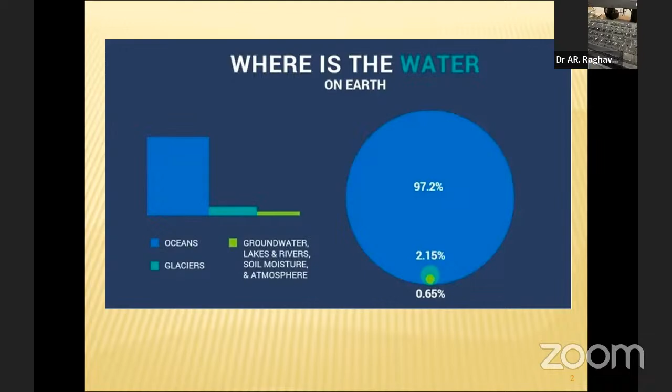I am Raghavan. Today I am going to discuss the management of drinking water quality with excess iron. Before going into the topic, this month we are celebrating World Water Day, so I thought it would be appropriate to talk about the water source. Where is the water on Earth? In the global water scenario, it is appropriate to know about the water resources.

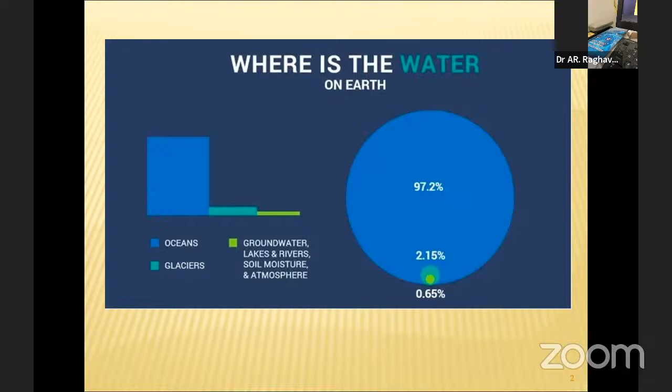Out of 100%, 97.2% of water is available in oceans, which is not suitable for drinking. And we are left with 2.15% in glaciers, and groundwater is 0.65%. This is the global water distribution. 97.2% in oceans is not at all useful for human beings. The same is given by numbers: ocean 97.23, glaciers 2.1%, and other forms of water. Groundwater is only 0.65% of the total water.

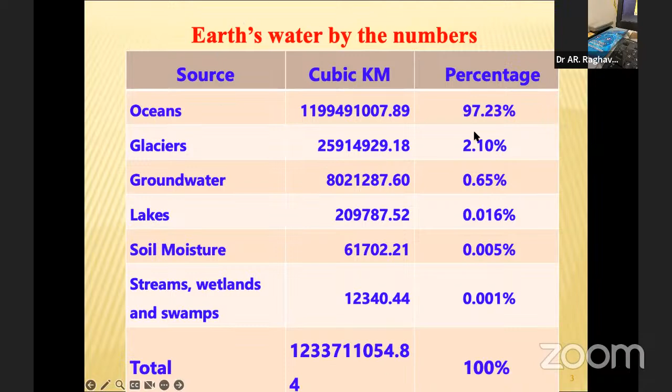Of 100%, only 0.65% is groundwater. Water in lakes, 0.016%. Soil moisture is 0.005%. Streams, wetlands, and swamps contain 0.001%. All these put together amount to 2.5% fresh water. We have to manage our lives across the globe with this quantum of water.

Coming to water quality standards, we are following BIS standard 10500:2012. According to that, I have given the acceptable limit and permissible limit in the absence of alternative sources. For example, turbidity is acceptable up to 1 NTU. If there is no other feasible alternative, we can go up to 5. Likewise, TDS 500, 2000, pH 6.5 to 8.5, with no relaxation beyond that. Alkalinity 200, up to 600. Total hardness 200, 600. Calcium 75, 200. Magnesium 30, up to 100 allowable in the absence of an alternate source.

Coming to iron, the point of our discussion today. It is prescribed as 0.3 and there is no relaxation at all. It should be maximum 0.3; beyond that it is not acceptable. This is followed by the World Health Organization, EPA, and in our Indian situation, BIS also specifies the same limit. Likewise, manganese 0.1 and 0.3.

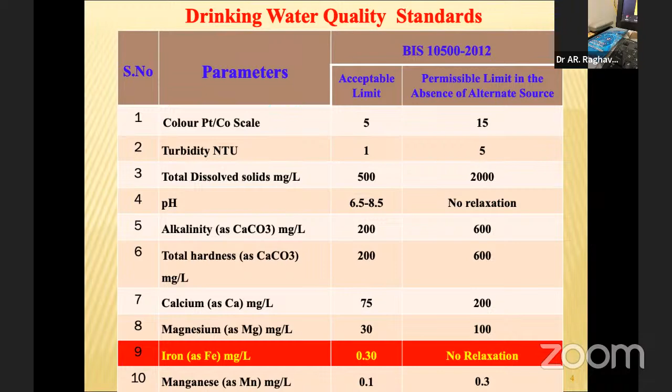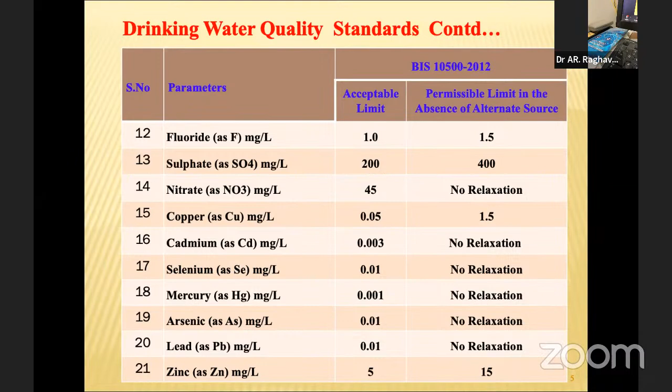Fluoride likewise, as you can see; sulfate 200, 400; nitrate 45, with no relaxation. Copper 0.05, 1.5. Cadmium 0.003, then 0.001 for mercury, arsenic 0.01, lead 0.01. There is no relaxation for these items. Zinc 5, and it can go up to 15.

In general, discussing water: water, as we all know, is an indispensable natural resource on planet Earth. The primary need for every human being is safe drinking water. Nowadays it is being called a commodity, as it is being sold. Groundwater is a major resource for drinking water in both urban and rural areas. It is a major freshwater resource, and more readily available than surface water.

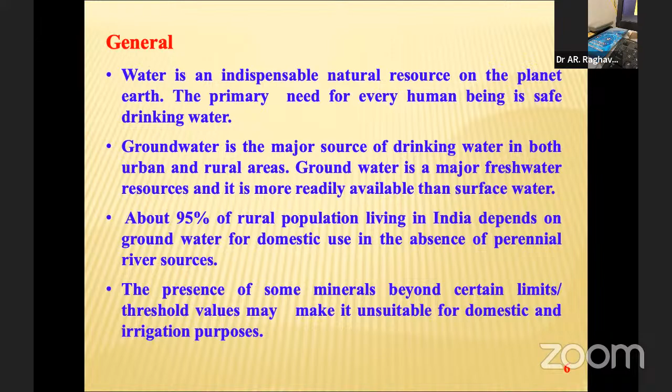About 95% of the rural population in India depends on groundwater for domestic use in the absence of perennial river sources. The presence of some minerals beyond certain threshold values may make it unsuitable for domestic and irrigation purposes.

Groundwater easily gets contaminated with iron, and though iron is an essential mineral for humans, its presence in water above certain levels makes the water unsuitable for health as well as aesthetic considerations such as discoloration, metallic taste, odor, turbidity, staining of laundry and plumbing fixtures. Moreover, iron oxides formed in reservoirs upon aerial oxidation of dissolved iron promote growth of microorganisms in water.

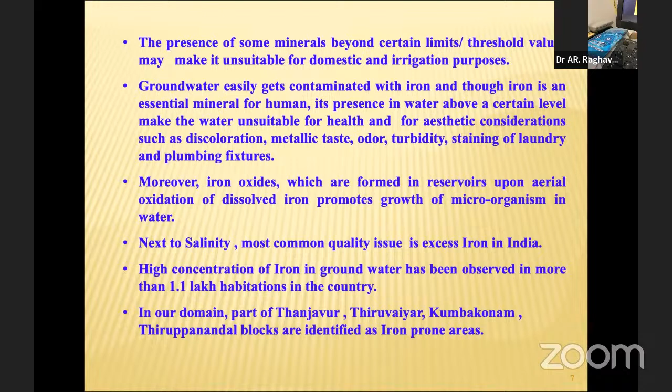Next to salinity, the most common water quality issue is excess iron in India. High concentration of iron in groundwater has been observed in more than 1.1 lakh habitations in the country. In our domain, parts of Thanjavur, Thiruvaiyar, Kumbakonam, and Thiruppanandal blocks are identified as iron-prone areas.

Harmful effects of excess iron in drinking water. Though iron is an essential mineral for human life, no doubt about it, we need to get rid of it when it enters drinking water because it has many adverse effects.

Iron in water affects our skin. The presence of minerals like iron and magnesium in excessive quantities can harm skin cells, leading to infection and wrinkles. Such water does not rinse off soap residue from the body, causing clogging of skin pores and buildup of oil in the skin, ultimately resulting in skin problems such as eczema and acne.

This is for skin. Effects on general health: the presence of minerals such as magnesium and iron in excessive quantities in water can harm skin cells, leading to infection and wrinkles. Such water does not rinse off soap residue from the body, causing clogging.

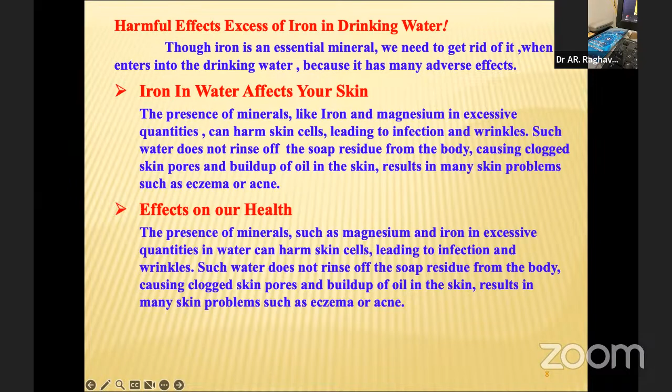Iron in drinking water develops an unpleasant metallic taste. If you use this water to make beverages like tea or coffee, the taste also gets affected. Also, water with high iron content will blacken fruits, vegetables, and other foods cooked in it and spoil the flavor.

Causes stains on plumbing fixtures and appliances. Iron tends to leave reddish orange stains and residue on bathroom fixtures, washing utensils, and dark red stains on cutlery and plates. It also causes the color of clothes to fade and reduces their quality.

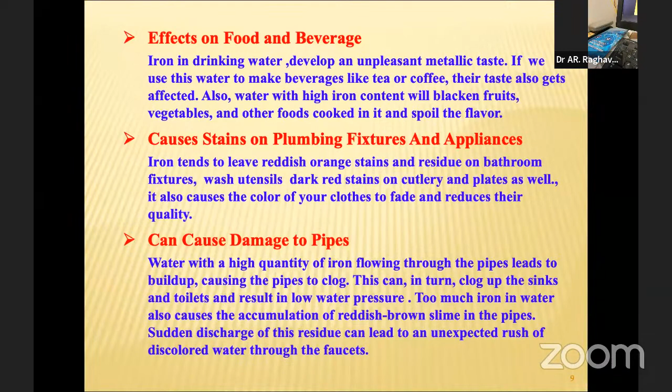It can cause damage to the pipes. Water with a high quantity of iron flowing through pipes continuously for a long time leads to build-up, causing the pipes to clog. This can in turn clog up sinks and toilets and result in low water pressure. Too much iron in water also causes accumulation of reddish brown slime in the pipes. Sudden discharge of this residue can lead to an unexpected rush of discolored water through the faucets.

This is another problem. Here are certain visuals on the effects of excess iron in water. See the staining due to iron in water while washing, and staining in plumbing fixtures due to excess iron in water.

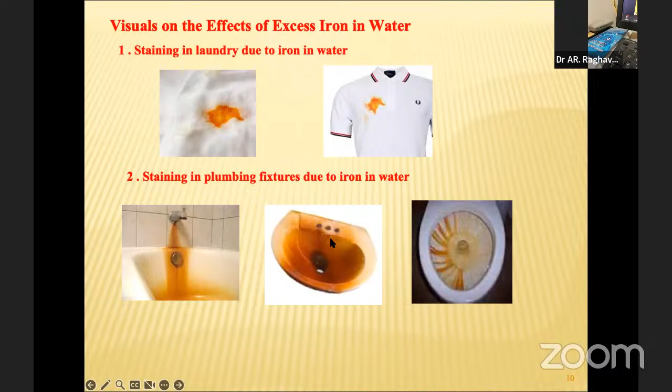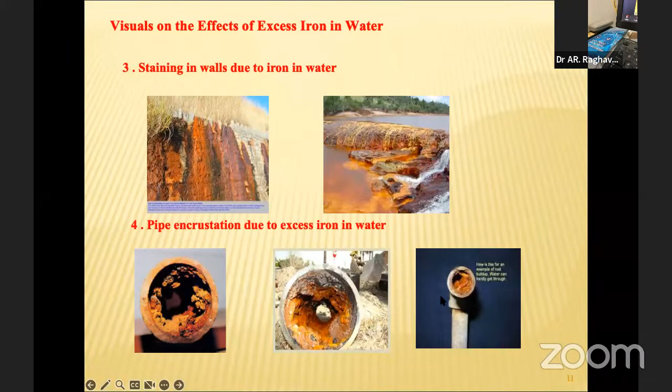Next, see how the surfaces of the waterfall contain excess iron. See the color of these waterfalls. And we are talking about pipe encrustation. See how these have built up over more than 15 years like this. The wall, see how the flow regime has reduced. See, these are all the things which are the causes of excess iron.

Okay, coming to a remedy. So far, the following are the practices employed for removal of iron. The major technique of removing iron is aeration and filtration.

The other techniques besides that: the major technique followed is aeration followed by filtration or sedimentation, whatever it is. Then comes adsorption, ion exchange, electrochemical, and membrane processes. These are all costly, membrane processes and all costly, and at large scale you cannot imagine the cost. So aeration and filtration are the primary techniques being adopted in our environment. Of the above, the most common principle is aeration followed by sedimentation, followed by filtration.

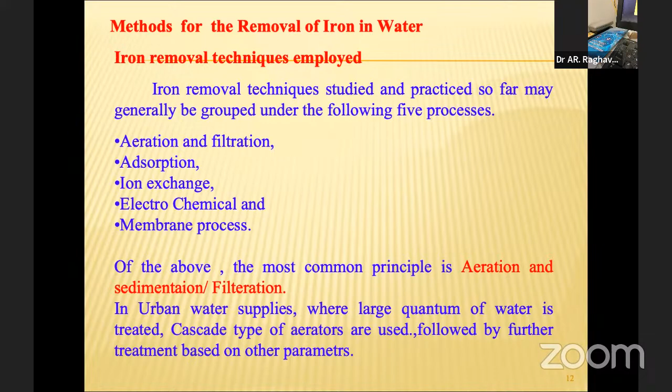Okay, in urban water supplies, due to the quantum of water being large, it will be treated by cascade aerators. During this cascade fall, the water gets aerated naturally by atmospheric oxygen. Then the iron, the floatable iron -- see, we have ferrous and ferric, two forms of iron. The ferrous is soluble and ferric is insoluble. So that soluble ferrous iron is converted on oxidation to ferric, and it starts settling at the bottom of the tray, and that is collected and eliminated during filtration. The treated water then goes for further steps of treatment. So in urban water supply schemes, iron removal is achieved by aeration, that too by cascade type aerators, as we see in the pictures.

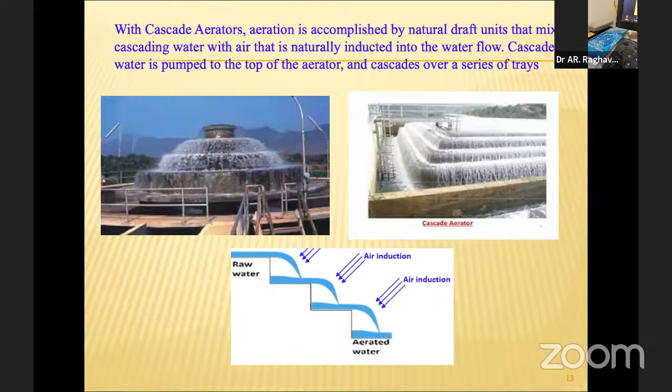Coming to our rural water supply scheme.

Even for rural water supply schemes, nowadays we have mega CWSs sourced from a single place, combining thousands of habitations to form a comprehensive water supply scheme. This will be done by cascade aerator because the quantum is large and the source is a single source.

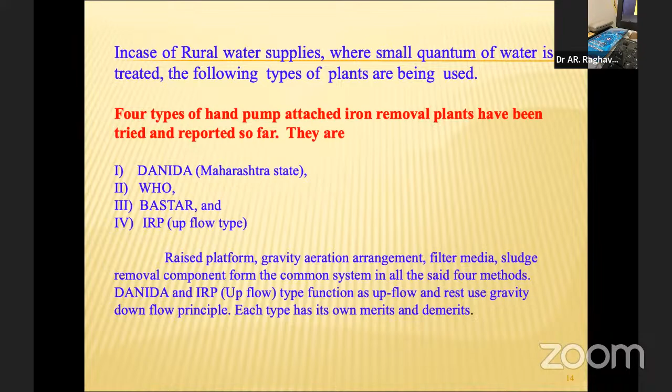But what I mean here is rural water supply schemes that are individual hamlet-wise, with individual power pump or hand pump schemes. For that case, it is done by on-the-spot removal. We are adapting 4 types: Danida type, World Health Organization model, Bastar type, and iron removal plant with upflow type. These 4 types of iron removal methods are followed, each having its own advantages. Common components in general are gravity aeration arrangement, filter media, and sludge removal, which are common in all the models.

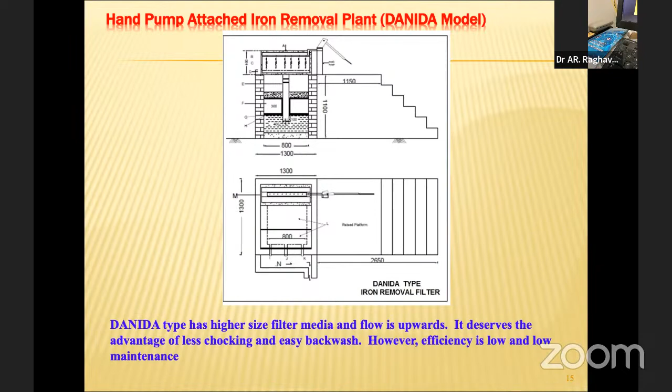This is the sketch showing the Danida type iron removal plant. Here the water is pumped through the hand pump directly to the plant, processed, and we get the product. Here the higher size filter media has an upward flow. It deserves advantage of less choking and easy backwash, however efficiency is low and maintenance is low.

Next, hand pump attached iron removal plant. This is developed by... again, more or less the same. Here the media is like slow sand filter media, very fine, so efficiency is high. It requires frequent cleaning, backwash is not possible, and maintenance cost is also high.

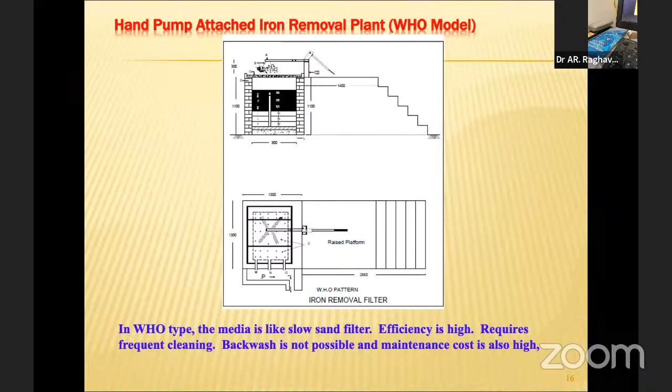This is developed by Bastar, with a provision of a detention chamber for pre-aeration. Here is the pre-aeration chamber, so thereby the removal efficiency will be a little bit higher.

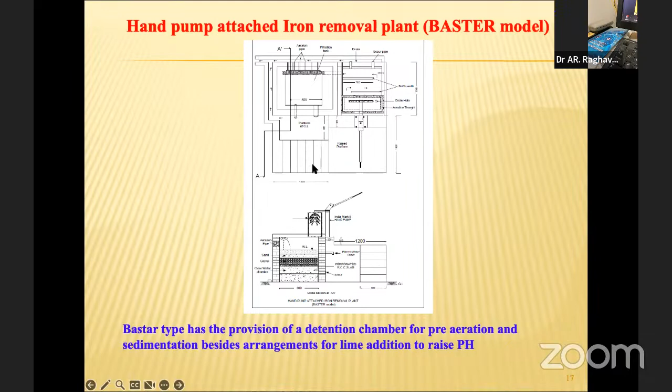Up flow iron removal plant for hand pump schemes. Here the water is supplied from the top and flows down. There is a sedimentation tank with plate settler, and the clear water gets into the clear water chamber, and thereby we are getting the filtered water.

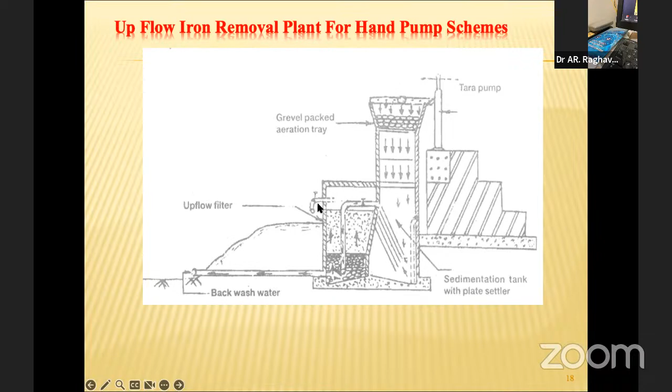Hand pump attachable iron removal plant, this is a masonry construction. This is what I mentioned for the blocks Thiruvidaimarudur, Tirupanandal, and Tiruvayar. Around 15 years before, the Board constructed around 18 or 20 plants of this type. The one shown in the picture is for hand pump, but even for power pump, it is for source water, raw water only. It was provided for power pump also, but due to lack of maintenance and follow-up, the system met with failure and is no longer functioning. Those plants are kept idle.

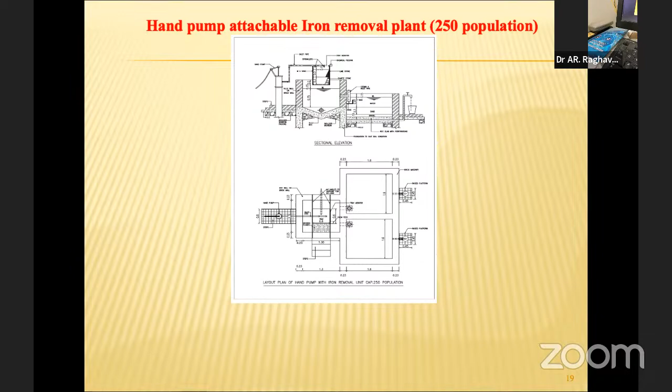This hand pump attached iron removal plant has masonry construction. The water is let in at the top and gets filtered through filter media of various grades, and the final water reaches the tap. This is for the hand pump serving 250 population.

This is a continuous iron removal system because the source is at a higher level. Raw water is pumped to an elevated service reservoir, and thereby supplied by gravity to the system where iron removal takes place, then stored in a treated water sump, pumped again to the clear water reservoir, and distributed through a gravity network. This system comes in various capacities; the one shown here is 5 cubic meters per hour.

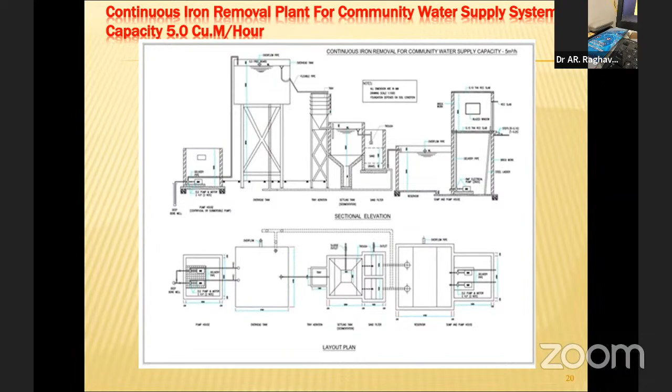Before going to my work, I did one of my research works on iron removal for domestic level. I aimed to develop a filter for domestic use, for which I collected samples from 12 to 15 hand pump and power pump sources in Tanjavur and Tiruvayur block, analyzed them, and tabulated the average values. See the iron levels I got.

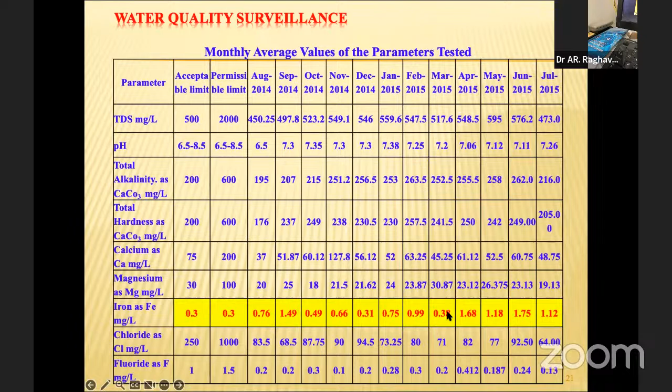0.3 is the acceptable limit. We have 1.68, 1.75 maximum through one full cycle, monsoon to monsoon, across all 12 months. Maximum is 1.75 and the minimum is 0.31, one sample in the month of December was 0.31, and again it goes up to 1.75. That's the background.

I aimed at developing a low-cost iron removal filter for domestic usage. Materials chosen for the filter candle: number 1, red clay, coal, rice husk, and cement, where cement is used as a binder. Number 3, coal, activated carbon, and cement as a binder. Number 4, hard broken aggregate, using 5 to 10 mm size, similar to what's used in the market as chips, graded between 5 to 10 mm, with cement as binder. These 4 types of filter candles I developed. Regarding the activated carbon, I thought of using fruit peels, waste peels.

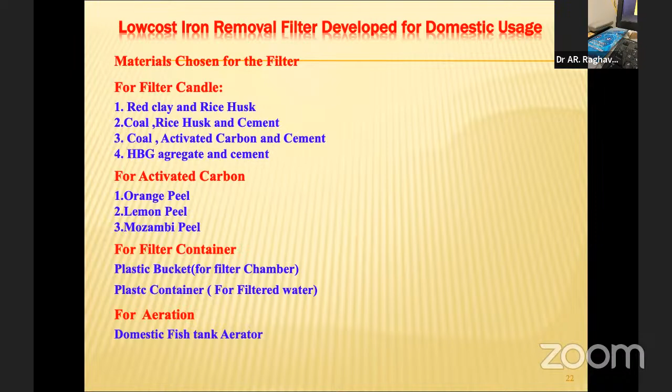I have collected orange, lemon, and Mozambi peels from this local juice shop, and that is being used for developing the activated carbon. For the filter container, I used a plastic bucket for the filter chamber, and the bubble top water system. I had the bottom container, I used as is for the filter water container. For aeration, I used a domestic fish tank aerator. So these are all the materials I have used.

This is the preparation process flow for the indigenous fruit peel adsorbent. This figure shows the Mozambi peel, and likewise the other two, orange and lemon. This is a raw peel, sun-dried and heated in a muffle furnace with acid, and this becomes a charcoal which is grinded, then adsorption process and filtration.

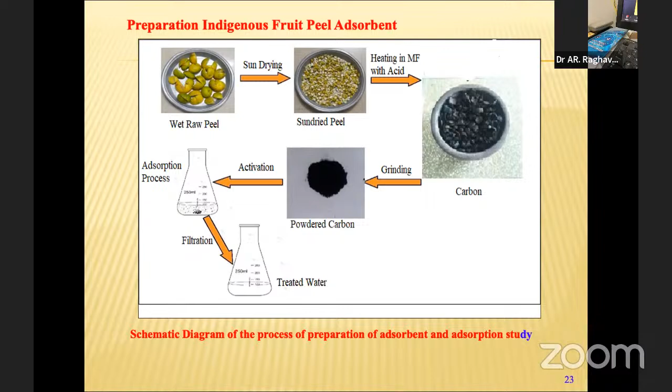Likewise, the adsorption capacity of the powdered carbon has been determined. Based on that, a decision was taken on which one is good and which is to be used for the candle.

Now, preparation of the indigenous filter candles. Filter candle made of red clay with rice is termed FC1. The other one is coal plus rice, FC2. Coal plus activated carbon, FC3. And filter candle with HB stone and cement, FC4.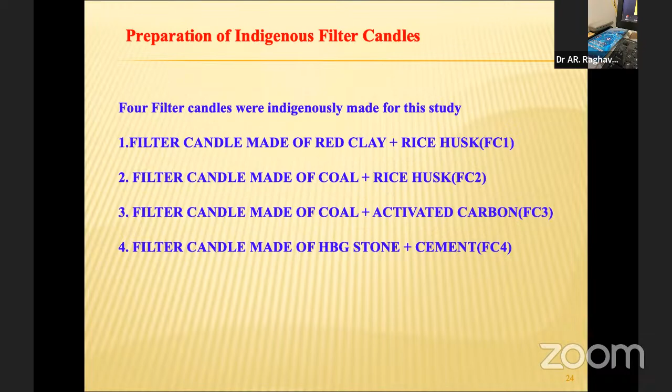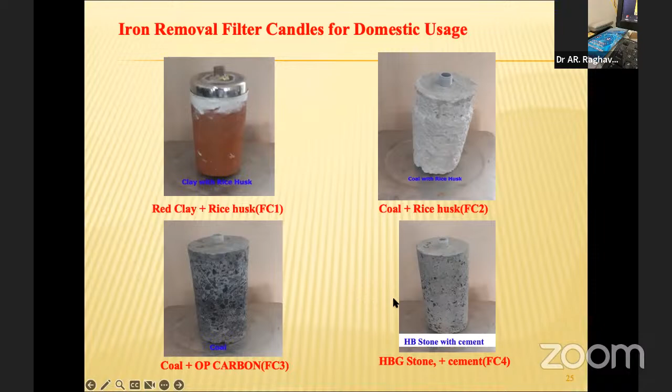These are all the 4 candles. First one is red clay with rice as a binder. Number 2, coal with rice, cement as binder. Coal with orange peel carbon, activated carbon with cement as binder, that is the third. The 4th one is HBG stone with cement as binder.

The domestic iron removal filter system comprises of the following units: aeration and filtration chamber is the top one, the filter element is fitted inside the bucket top container, and the treated water collects in the bottom chamber. The aeration arrangement, I will show in the next visual.

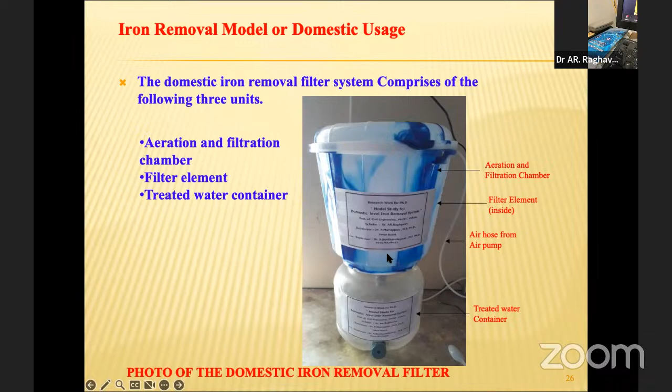The adsorbent characteristics: orange peel biochar (OPB), lemon peel biochar (LPB), and Mozambi peel biochar (MPB). The yield is 30.66 for orange, 34.29 for lemon, and 29.73 for Mozambi. Moisture content is 9, 10.25, 12. Ash content is 38, 47.5, 42. Bulk density is 0.28 for orange peel, 0.33 for lemon, and 0.24 for Mozambi. Uniformity coefficient is 2.32 for orange, 2.25 for lemon peel, and 2.25 again for Mozambi.

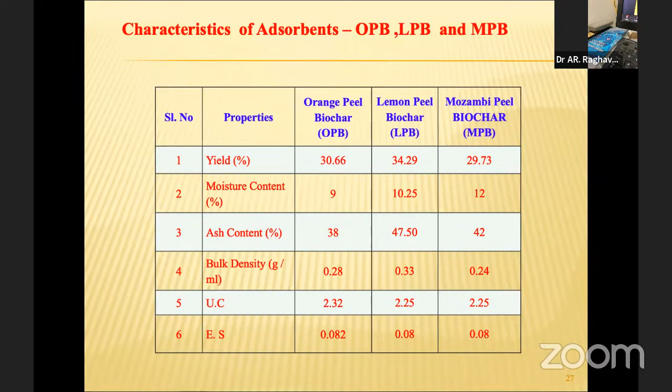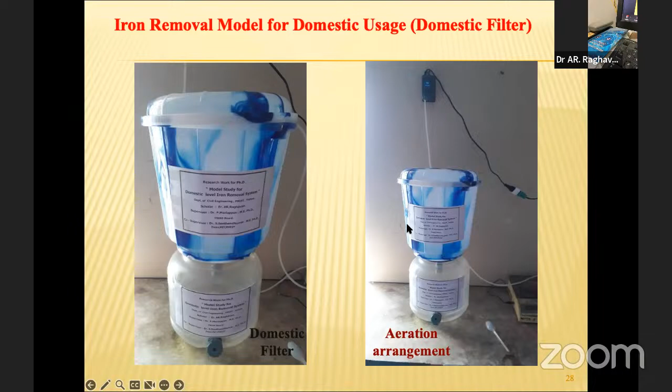Physical characteristics of the candles: the candle is 100 cm in diameter and height is 200. Weight of FC1, red clay with rice, is about 2.44 kg. The second one, coal with rice, is 1.168. Third one, coal with orange peel bioactivated carbon and cement, weighs 1.718. And the fourth one is blue granite stone with cement.

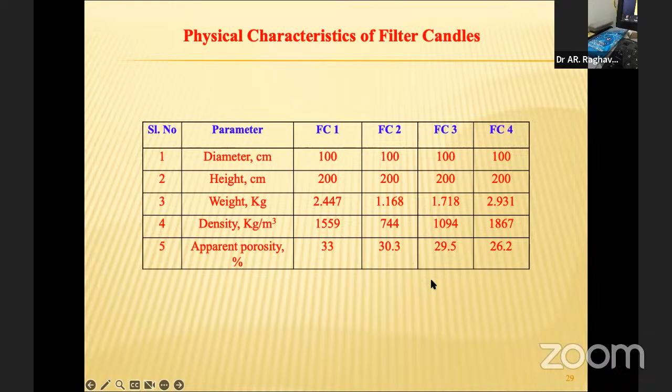Density is 1559, 744, 1094 kg per metric cube, and 1867. Apparent porosity: first one is 33, 30.3, 29.5, and the last one is 26.2.

Comparing the filtration rate of various candles: FC1, clay with rice, is 19. Number 2, FC2 is 17, 16.5, and FC4 is 16.

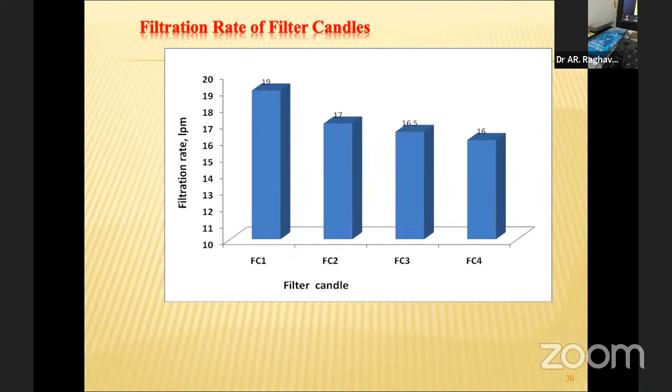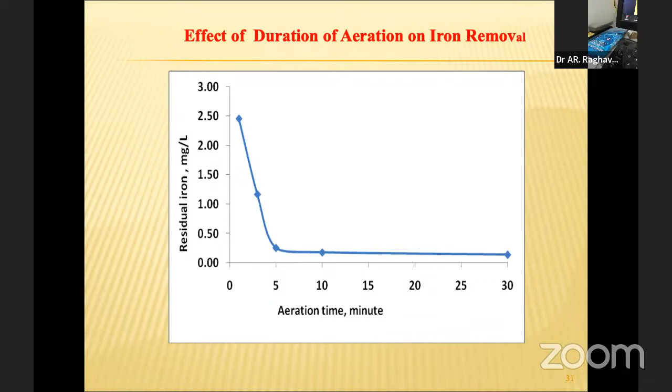Aeration time: effect of duration of aeration on iron removal. 2.5, and the efficiency of aeration removal is almost 95%.

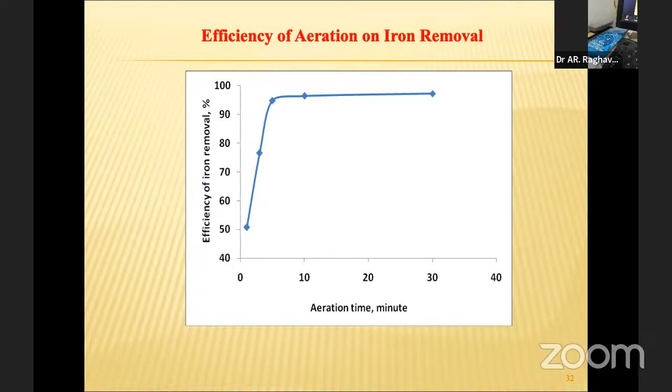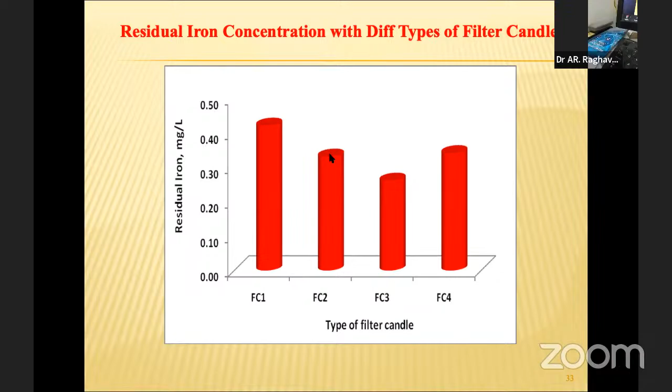It is in laboratory scale only. It has to be commercialized, and so many steps we have to go further. We are aiming for IP rights also, and it is under process. This is my work I have done for my PhD.

So the filter candle manufactured with coal plus OPB is capable of bringing down the residual iron to less than 0.3 milligram per liter. Orange peel biochar, due to its adsorption property, may be removing a little soluble iron too, that's what we thought. The performance of this adsorbent is superior to the other two. Considering the iron removal efficiency, FC3 is chosen for the development of the domestic iron removal filter and for further studies.